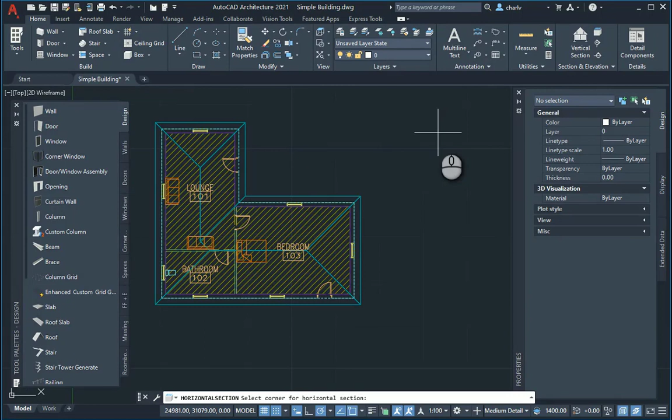It'll ask me to select the extents, then the height of the section plane. I'm going to make it 1.2 meters, and then the depth towards the foundations, which is 2 meters. That's fine. Now it just asks me for the insertion point.

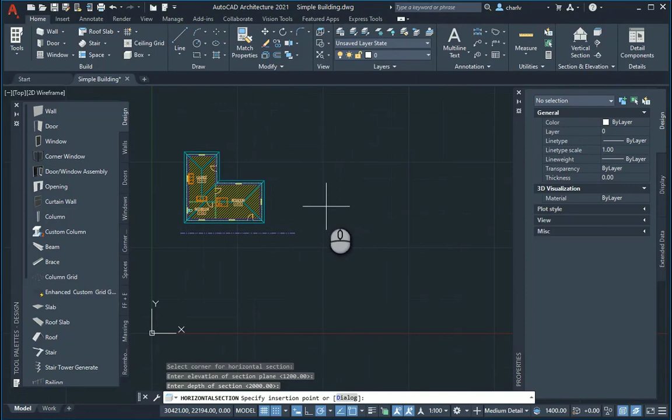I'll just add it to the right over there. So there's the floor plan of the little building.

The next up is a section, so I'll go to the vertical section. It'll basically ask me to draw it through the building, which I'll do from the left over here to the right hand side over there. I'll press enter and it'll ask me what do I want to see.

Perhaps I want to see the top half of that particular item, and it'll ask me to insert it over here. As I do, it adds the particular view.

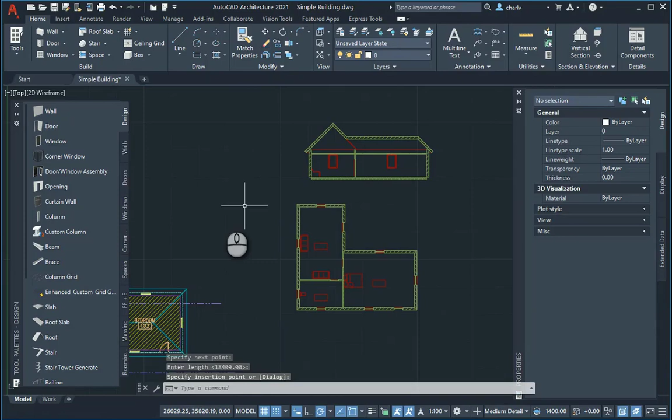Then it also asks me - now I can use the exact same tool to create an elevation, so I'll go and do that, creating maybe an elevation of this over here.

I'll just use the same particular tool over here, looking at the whole building to the top there. The insertion point I'll add over here, and there's the basic views.

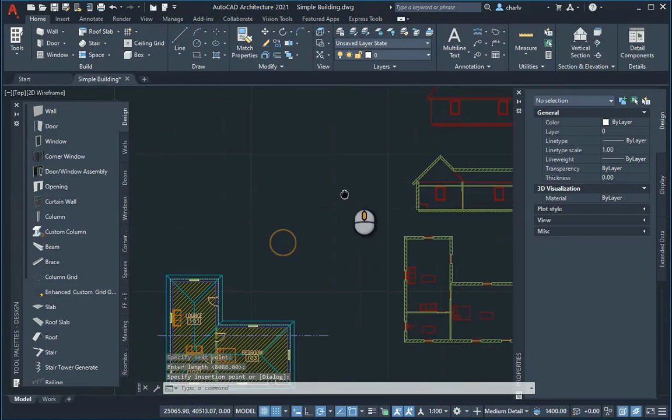Now if anything changes here, so maybe this bedroom gets extended, I'll just pick up the wall over here firstly, and just extend it a little bit.

You'll notice that the internal space also changes, but not the roof.

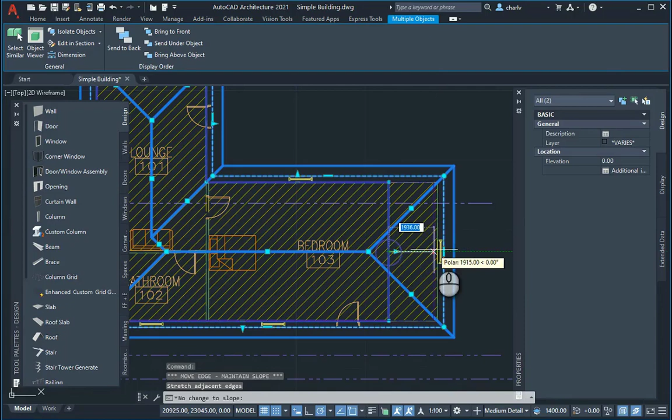So I'll change the roof as well as the floor. There's a little floor line, and I'll just do the same there. So I'm happy that that's changed.

Let's go and look at how to update the views. In this little tab there's a refresh current drawing option. As I do that, these views will check the floor plan where it's generated from and then update the particular item.

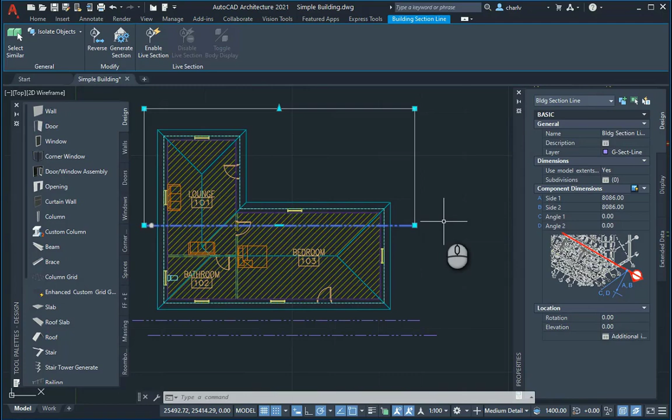Just remember that if you do have a section line like this, that section line only covers up to this point. So if your wall moves beyond that particular section line, you just need to increase the width of the section to include all the objects.

So basically that concludes the video. Just one final thing I can mention: the look of these views is determined by a style manager, which we will perhaps cover in a future video.